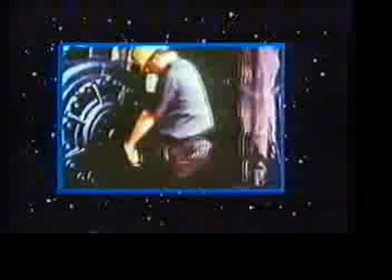Many processes in the petroleum industry operate at high pressure. Normal working pressure helps keep production vessels operating efficiently. But excessive pressure can be dangerous to both people and equipment. And for this reason, vessels are equipped with pressure relief devices to guard against excessive operating pressure.

This is the first section of a 4-section module covering the importance of relief and safety devices commonly used in the petroleum industry. In this first section, we will see how excessive pressure can present a safety hazard and how excessive pressure can be relieved by special devices.

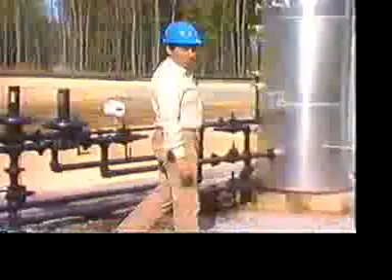Millions of years ago, high pressure and temperature helped create petroleum. And today, high pressure and temperature are still very much a part of the production process. Production separators and heater treaters, for example, use pressure and heat to remove oil and water emulsions and natural gas from other well fluids. During these processes, excess liquid and gas pressures can build up in process vessels, as well as in pipelines and storage facilities.

If this overpressure is not relieved, serious damage can occur to the vessels and pipes. And when vessels or pipes burst from excess pressure, there can be potential safety hazards to personnel, equipment, and the environment. There are many different kinds of pipes and vessels operating under different conditions and in different environments. But all pressure relief devices fall into 3 basic types: relief valves, safety valves, and rupture discs. Let's look at the basics of these 3 devices.

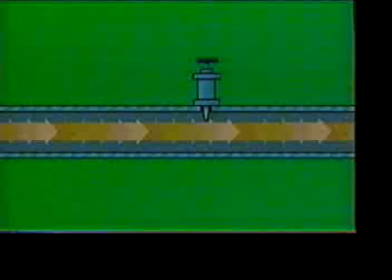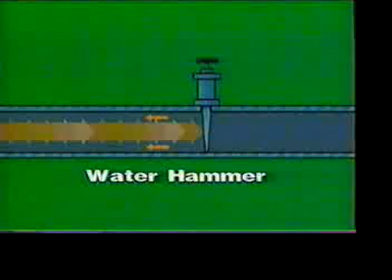In liquid systems, the action of quick closing valves throughout the system can cause hydraulic pressure waves. These pulsating waves are commonly called water hammer and can damage vessels and piping. This excess liquid pressure can build up quickly and must be relieved quickly.

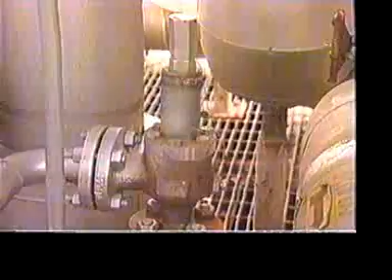Relief valves are commonly found in liquid processing systems and in areas where system pressure can build up during processing. As you can see, relief valves come in a variety of designs and can be found in many different vessels at any stage in processing.

Another relief device is a safety valve. Safety valves are used in both liquid and gas systems, where pressure builds up rapidly and must be relieved quickly. For example, in a liquid system, this can happen when a pump discharge line is blocked shut. In gas and steam systems, pressure can build quickly because of change in processing conditions.

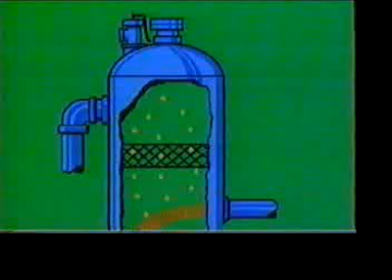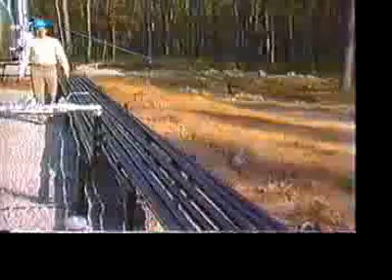In gas and steam systems, overpressure may be caused by changing pressures coming from the well, or by high heat buildup somewhere in the system. The vessels and pipes that are used for gas and steam processing are built to handle the normal operating pressures, plus a margin for safety. Here again, high pressures can build up very quickly and must be relieved quickly.

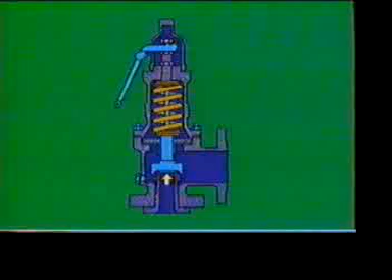This valve is sometimes called a pressure safety valve or POP valve. It quickly opens all the way to relieve the high pressure condition, then quickly closes all the way when pressure is back to normal.

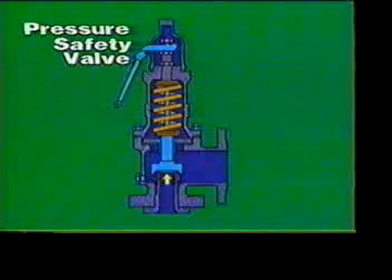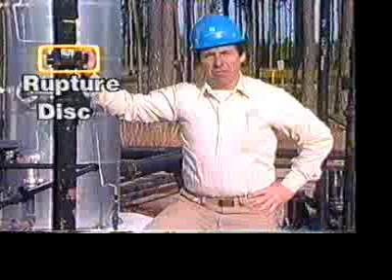Sometimes pressure can build up higher or faster than can be relieved by the devices we've mentioned so far. The third type of device, the rupture disc, can be used by itself or in addition to a relief valve or safety valve. Rupture discs are typically set at 25% over the setting of the relief valve or safety valve. When the system pressure reaches the rating, the disc will burst open to provide dependable and definite pressure relief.

Whether installed by itself or along with a relief valve or safety valve, the rupture disc can be found on a variety of vessels, and each one may look slightly different.

High pressure and high temperatures are an integral part of petroleum production, and we must take precautions to keep them from getting out of control. In this section, we've looked at the basics of pressure relief devices. We've gone over how pressures and temperatures can build up, and the three basic types of devices that help relieve the excessive pressure from pipes and vessels.

All right, take some time now to stop the videotape. Fill in the blanks and answer the questions in your student manual. When you come back, we'll go over some of the specifics of how these devices work. See you when you're finished.

When pressure builds up in a liquid processing system, it can occur gradually or it can occur quickly. A relief valve is designed to automatically open in proportion to the increased pressure. This is the second section of a module covering safety relief valves and rupture discs. Section 2 covers the design and operation of direct acting relief valves.

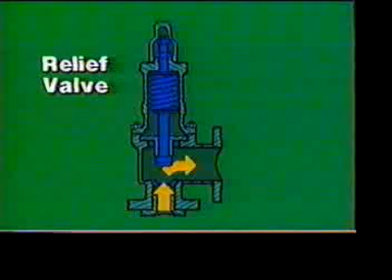Relief valves are commonly found in liquid processing systems. When pressure increases above the normal level, the relief valve opens to bleed off some of the liquid into a vent or bypass line. If the system pressure continues to build, more liquid must flow out of the system. When the pressure falls back to a normal level, the valve closes.

Typically, relief valves are set to open at the maximum allowable working pressure. Most older systems use a direct acting type of valve. Now, on newer installations, it is more common to see a pilot operated relief valve. There are two types of direct acting relief valves: spring loaded and weight loaded. Let's take a closer look at how they are designed.

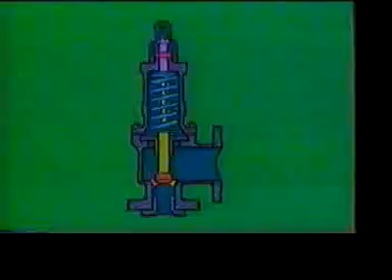In a spring loaded relief valve, the components are the casing, the inlet, outlet, disc, seat, the spindle, sometimes called the stem, and the cap. The disc or plug is kept in place by a spring washer, adjusting screw, and a lock nut.

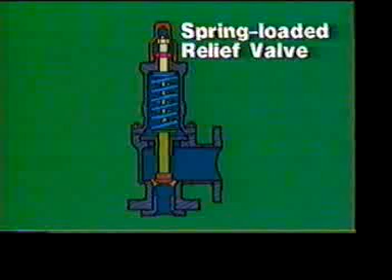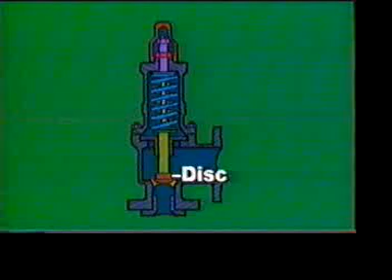The entire assembly is enclosed in a casing that is threaded or flanged at the outlet and inlet for connection to the system. Besides providing a method for connecting to the system, the casing also forms a protective enclosure for the parts and holds them in place. The disc of the relief valve is held against the seat by the spring assembly. This blocks the path between the inlet and the outlet until the system pressure increases above the pressure setting of the valve.

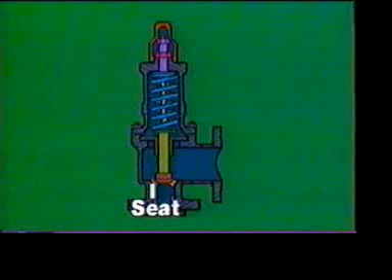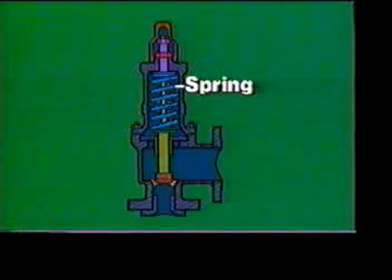Some relief valves use a seat that's a permanent part of the valve. Others have a threaded seat bushing. The spindle guides the up and down motion of the disc. The spring goes around the spindle and is held in place by the disc or spring washer at the bottom and a spring washer at the top.

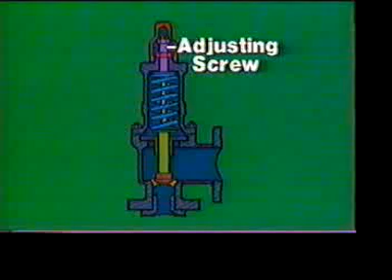The adjusting screw exerts a downward force on the spring washer and the spring. The adjusting screw is also used to compensate for changes in the spring tension over time. A nut keeps the adjustment secure. A cap covers the top of the spring assembly to keep dirt out. The cap also reduces the chance of tampering with the valve setting.

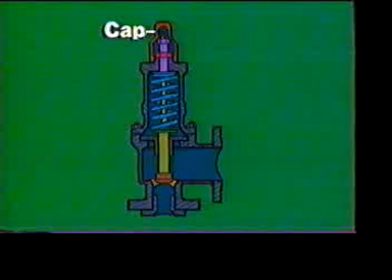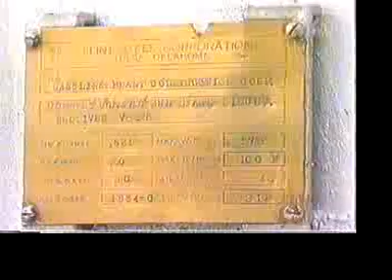Relief valves are made to function over a range of settings. There's an ID tag on the valve that lists the operating range and set point. And on the vessel, the ID plate indicates what the specific operating pressure should be. As the pressure reaches the valve set point, the valve begins to open. Let's take an example. Say the set point is 20 psi.

When the pressure in the system reaches 20 psi, the disc lifts off the seat and the valve opens. The greater the system pressure over the set point, the more the valve opens, until it's fully open. The vertical distance the valve opens is called the lift. It is common for relief valves to have lifts from a fraction of an inch to several inches.

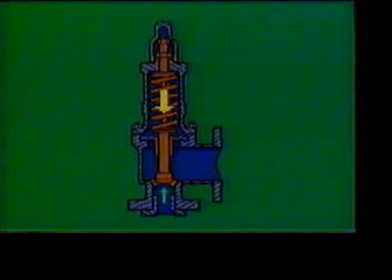As the system pressure reduces to the set point, 20 psi in our example, the downward force on the disc starts to close the valve. The valve will completely close at a pressure 5 to 7% below the set point. Spring-loaded valves are used in high-pressure applications because the springs can develop strong holding forces. As the disc is lifted, the compression of the spring makes it more difficult to lift the disc.

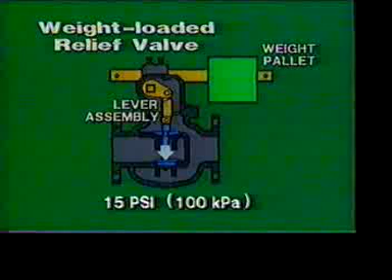In the weight-loaded relief valve, the seat closing force is provided by the weight pallet and lever assembly. Weight-loaded valves are usually used for operating pressures below 15 psi, such as in heater treaters and atmospheric vessels. Now, let's take a look at the installation of relief valves. Care must be taken when replacing and adjusting relief valves, and only certified personnel should perform the work.

Like many other safety devices, the function of relief valves benefits in 3 areas: protection of the personnel working in the area, protection for the operating equipment, and protection for the area around the equipment. Valves should be piped so that discharge flows to overflow tanks or into a vent line. Under no circumstances should discharges be allowed to spill onto the ground or splash onto the equipment or personnel working nearby.

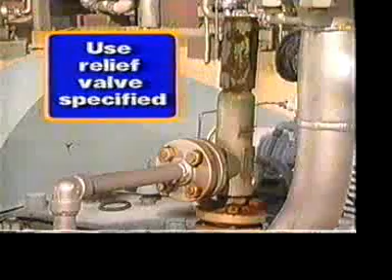For the initial installation, the relief valve is normally specified by the equipment manufacturer or by company engineers. In any case, use only the relief valve specified. When it's replacement time, check the specifications with your supervisor. Then verify that you have the correct relief valve. If it's not exactly the same model or manufacturer, it must be exactly the same type, with the same operating range and set point.

If you are replacing relief valves, remember you are working around high-pressure systems. Follow all the recommended safety practices and procedures, and read the directions carefully in the installation manuals and on the equipment itself. Get into the routine of checking each installation to be sure there are no leaks at either the inlet or the outlet. Check the valve itself. Make sure it doesn't leak. And there should be a proper discharge path for the vented liquid.

Relief valves should not be shut in on the downstream side, except when the valve is being replaced. And that brings us to a stopping point. In this section, we've talked about the workings of a direct acting relief valve. We've gone over the workings of a spring-loaded valve and identified weight-loaded valves. And we've seen how relief valves are designed to protect personnel, equipment, and the environment.

Now stop the videotape and look over this section in your student manual and answer the questions. When you return, I'll be over at another vessel and we'll talk about another kind of valve. See you when you get back.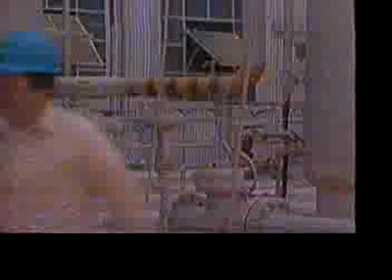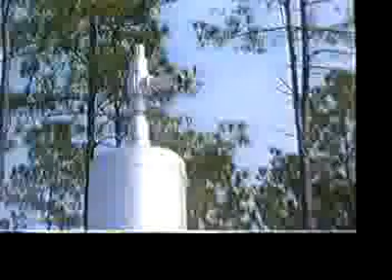When pressure builds up in a gas processing system, it generally builds up rapidly and must be relieved rapidly. Relieving pressure in a gas system is accomplished with a different kind of valve, a safety valve. This is the third section of safety relief valves and rupture discs. In this section, we will cover the operation and various designs of safety valves.

Gases and steam can be compressed. In fact, it is normal that when gas reaches the disc in a valve, it compresses and builds up before escaping through the valve. This compression can cause system pressure to build up rapidly. A liquid-type relief valve doesn't open fast enough to relieve gas or steam pressure. In fact, its slower action can contribute to the pressure buildup.

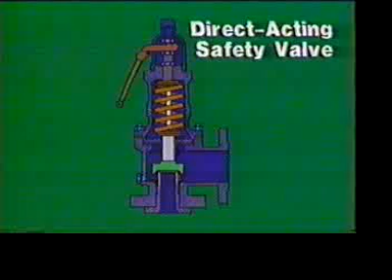So a gas system requires a valve that will pop wide open under excess pressure. That's the principle behind a pressure safety valve, or PSV. Even though a safety valve relieves pressure more quickly than a relief valve, their design and components are very similar. The direct acting safety valve is made up of a casing, inlet, outlet, disc, seat, spindle, cap, and on some, a lifting lever.

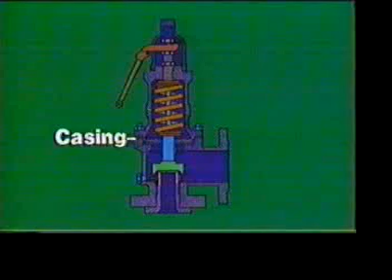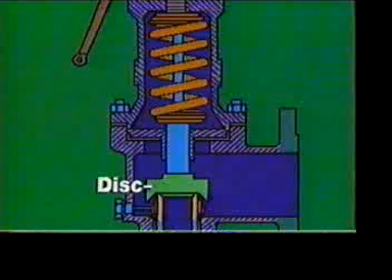The safety valve assembly is protected by the casing, which is threaded or flanged for connection to the system. A cap covers the top of the assembly and reduces the chance of tampering with the valve setting. The disc is held in place until the system pressure increases to the point when the disc pops off the seat. The spindle guides the up and down motion of the disc.

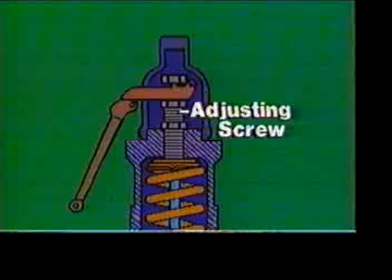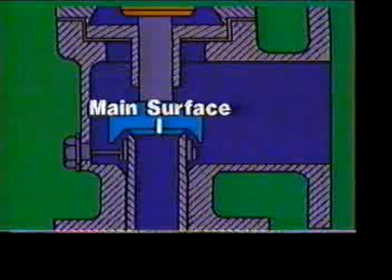The adjusting screw is used to adjust the valve set point. If the spring tension changes over a period of time, certified personnel will reset the adjusting screw. The popping open of the safety valve is due to the design of the disc. There is a main surface of the disc which is always in contact with system pressure, and a lip which is not exposed to system pressure.

At the set point, the disc will lift off the seat. But what makes this valve different is that the lip then becomes exposed to the system pressure, creating a larger surface for the system pressure to press against. This large area makes for a larger lifting force and causes the valve to pop open.

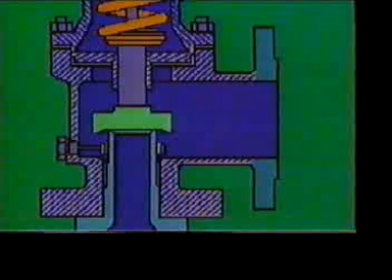When the pressure drops to a safe level, the same operation happens in reverse. And because of the high velocity of the escaping gas, the valve must close quickly and completely. Otherwise, the high velocity can damage the surfaces of the valve opening. Damage is also prevented by a key feature of safety valve operation known as the huddling chamber. This chamber provides a small cushion that keeps the disc from slamming into the seat and damaging the valve.

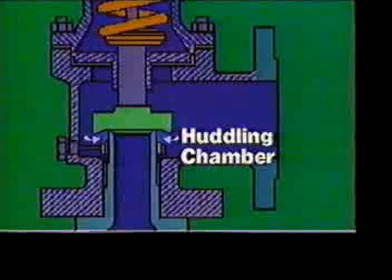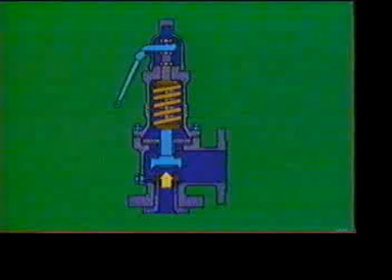The pressure at which a valve opens all the way is called the popping pressure. The opposite, rapid closure of the valve, is called positive seating. The difference between the popping pressure and the positive seating is called blowdown. As an example, if popping pressure is 200 psi and the positive seating pressure is 190 psi, the blowdown is 10 psi.

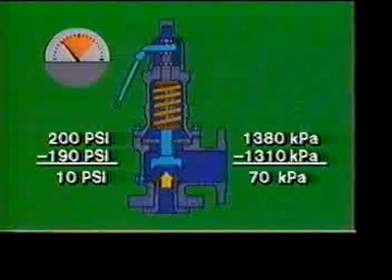Some safety valves have another special assembly not found in relief valves: the hand-operated lifting assembly. It's used for periodically testing the valve and does not move in the normal operation of the valve. But for testing, when the hand lever is lifted, the assembly pushes upward on the release nut. This action lifts the spindle and the disc. When the lever is released, the valve closes.

Some valves are designed to be used as a relief valve in a liquid system or as a safety valve in a gas system. These are called safety relief valves, and they are commonly found in systems that contain liquid-gas mixtures, such as in production separators and heater treaters.

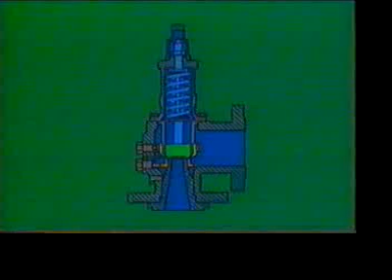It's common for a safety relief valve to have a nozzle-shaped inlet and two sets of adjusting rings. Depending on how the adjusting rings are set, the flow of the system pressure will either be directed at the lower rings for a relief valve or directly at the disc for a safety valve. These kinds of valves are adjusted at the factory for their particular type of service, and they should never be readjusted on site except by certified personnel.

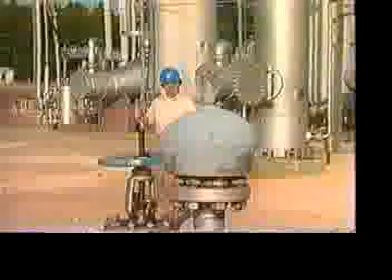Often in a processing plant or an offshore facility, we use what is called a pilot-operated relief valve. Sometimes it's called a pneumatic relief valve. They have a sensing device for detecting system pressure that's separate from the pressure-relieving part of the valve. The components of a pilot-operated relief valve are the casing, inlet, outlet, piston, pilot line, disc, seat, and spring.

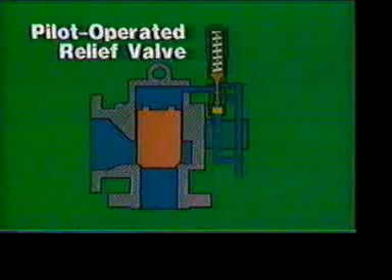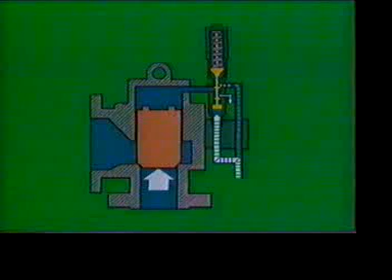System pressure is applied directly to the bottom of the piston and through the pilot to the top of the piston. When the pressure reaches the set point, the pilot opens. This blocks the pressure passageway that feeds the top of the main valve and bleeds off pressure from above the valve piston. This allows the piston to open and the overpressure is relieved.

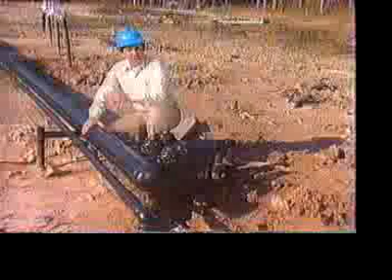Sometimes when more than one pilot-operated relief valve is vented through a common header, a backflow could occur due to downstream pressure. If backflow is possible, use a backflow preventer in the pilot line, a check valve, or a split piston relief valve. Pilot-operated relief valves have many advantages over direct acting valves. They're cheaper, they handle more volume, they provide a bubble-tight seal, and they're easy to test in place.

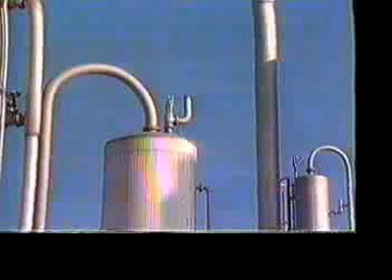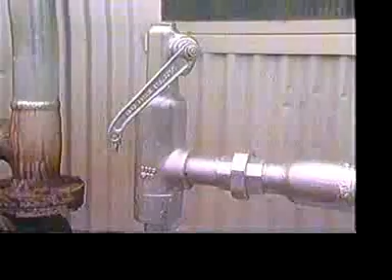As with relief valves, there are three important things to think about when installing and replacing safety valves. Protection for the personnel working in the area, protection for the operating equipment, and protection for the area around the equipment. The initial installation of each safety valve is normally specified by the equipment manufacturer or by company engineers. Only the valves specified for each application should be used.

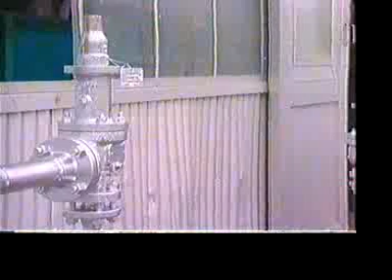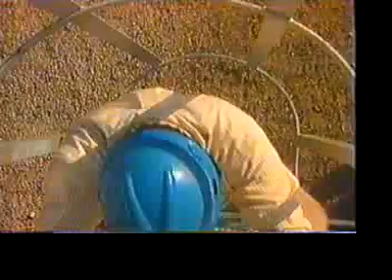Safety valves and safety relief valves are designed to operate over a range of pressures. If you install or replace a safety valve, be sure to check the equipment ID plate and verify with your supervisor the correct type of valve required. Then check the ID tag on the valve to be sure it's the correct one. If it's not exactly the same model and manufacturer, it must be exactly the same type with the same operating range and set point. As mentioned with relief valves, adjustments on safety valves should never be made except by certified personnel.

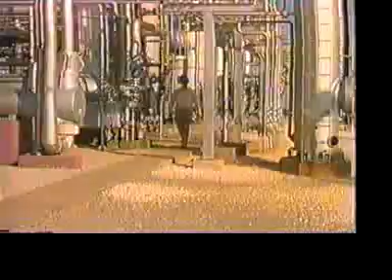Care must be taken when installing a valve that gas discharges are directed away from equipment and personnel. If necessary, the outlet should be piped into a vent line. And again, remember that you are working around high-pressure systems, so be careful. If you install a safety valve, follow all recommended safety practices and procedures. Check the installation periodically. Be sure that there are no leaks in the outlet, the inlet, or the valve itself.

And that brings us to the end of this section. We've taken a look at the various kinds of safety valves, how they're used, and how they're different from each other. We've also looked at the safety relief valve and where it is commonly used. All right, it's time to look over your student manual and answer the questions. Take your time, and I'll meet you back here when you're finished.

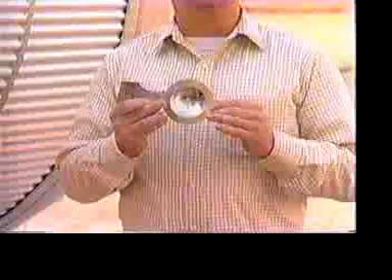All of the pressure relief devices that we've talked about so far are specialized valves, each suited to a particular need. A rupture disc is a device that can be used by itself or in addition to a relief valve or safety valve. A rupture disc is the simplest pressure relief device. There are no moving parts. It's lightweight, fast-acting, easy to install, and relatively inexpensive. It may not look like much, but oftentimes this little piece of dome-shaped metal is the last line of protection against overpressure.

This is the fourth section, covering relief valves and rupture discs. In this final section, we will see how rupture discs are used to protect systems from overpressure. A rupture disc is designed to rupture at a predetermined pressure. Sometimes a support, or knife edge, is used along with the disc itself.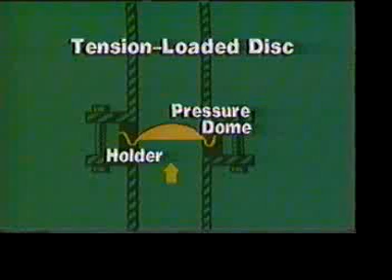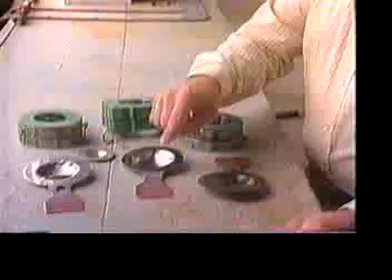The most common type of rupture disc, called a tension-loaded disc, is simply a holder with a pressure dome in the center. When the system pressure rises to a predetermined point, the dome bursts. Rupture discs are designed to fit into a holder that can be bolted in place between two flanges. An ID tag lists the size of the disc, type of material, and the rupture pressure in PSIG.

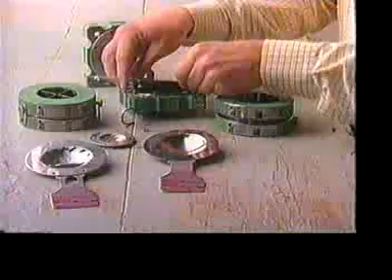The disc is placed in a fitting known as a safety head. Newer safety heads have positioning pins to ensure the correct installation of the disc. When pressure rises too high for the valves to relieve, the disc bursts instead of the internal piping or vessel components. This brings added safety for personnel and equipment.

Another type of rupture disc is called a rebuckling disc, and they come in several forms. One form of rebuckling disc has the disc itself and a frame that holds a knife edge on the downstream side. When the disc reverses due to system pressure, the knife blades cut through the metal and the disc bursts.

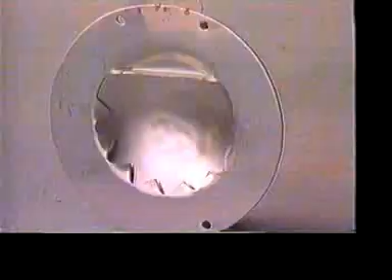Other versions of the rebuckling disc do not have a knife edge. Instead, the disc is scored with a pattern, such as an X or a circle. Still another version is the Jaws type rebuckling disc. In every case, the dome of the rebuckling disc is always installed on the system side, and it rebuckles toward the downstream side.

Rupture discs are designed to be the last resort pressure relief point in a system. The disc is set at a pressure higher than the safety valve, but less than 1.5 times the rated working pressure of the vessel. Simplicity is the main advantage of rupture discs. They are lightweight and have no moving parts. Also, rupture discs act faster than safety relief valves.

Now, the main disadvantage of rupture discs is that they can't reset themselves when the pressure returns to normal. They must be replaced. That means shutting down the entire system during replacement. Also, there's no way to test a rupture disc, because any test would be destructive to the disc.

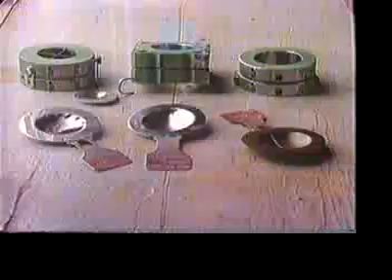It's very important that the correct disc be installed properly. If the disc ruptures at too low a pressure, it may have to be replaced sooner than necessary. If it ruptures at too high a pressure, protection for the system is lost and serious damage can occur.

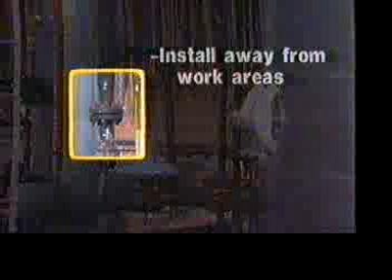Proper procedures for replacing rupture discs are as important as proper selection of the discs. The disc should be installed, or at least vented, away from work areas or places where people pass by regularly. The environment must also be protected from the sudden release of high-pressure gas or liquid. Be sure a vent line is provided to carry the discharge away from fired or high-temperature equipment.

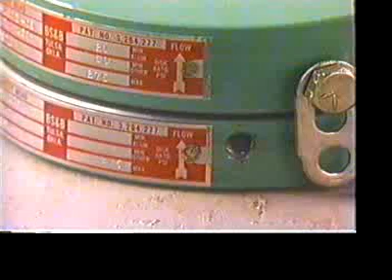Even though the design is simple, great care must be taken to install the rupture disc correctly. Most safety heads have arrows indicating flow direction. A reverse buckling disc has 3 pins to guide it, so the proper side is always facing downstream. Some safety heads have a hook called a J-bolt to assure proper installation.

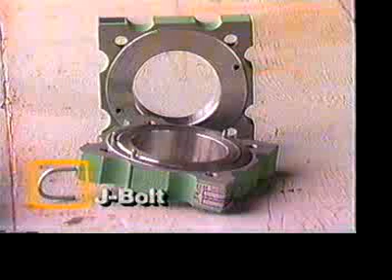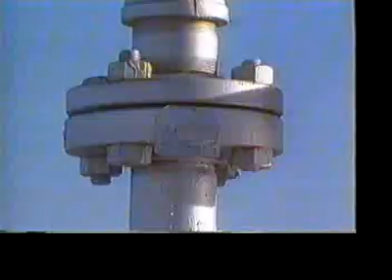Follow the installation instructions carefully. It's possible that a disc installed improperly could be extremely hazardous, allowing system pressure to rise 8 to 10 times the fail-safe pressure limit. Rupture discs must also be protected from the outside environment. They are essentially bare metal surfaces, and exposure to the elements and buildup of foreign material will interfere with normal operation, so they should be installed with some kind of protection.

And that brings us to the end of this section. Our topic in this section has been rupture discs. Get your student manual out now. Look over the material and answer the questions. Now, we've discussed the difference in tension-loaded discs and reverse buckling discs. We've seen how rupture discs are installed and how they protect systems from overpressure.

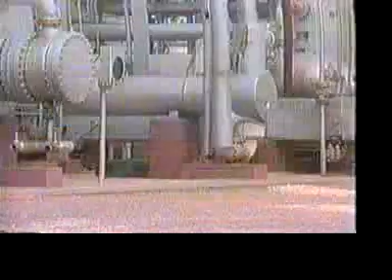That also concludes this module of instruction. In this module, we've looked at various kinds of relief valves, safety valves, and rupture discs. We've seen how they're designed, how they operate, and how to install them. Safety is a top priority in the oil field, and these pressure relief devices play a vital part in protecting personnel, protecting production equipment, and protecting the environment. It's an old saying, but it's true. Safety is no accident. The proper installation and maintenance of these pressure relief devices will keep safety first.